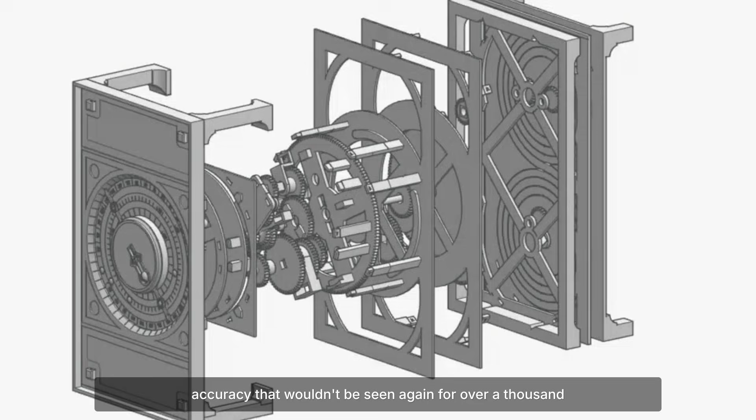In 1901, divers descended into the dark waters off a Greek island and pulled corroded bronze from a 2,000-year-old shipwreck. What they recovered looked like nothing, formless, destroyed. Then someone noticed teeth cut into the metal. Gears. Dozens of precision-engineered gears, designed to predict eclipses, track lunar cycles, and map the heavens with an accuracy that wouldn't be seen again for over 1,000 years. This was an ancient machine built to forecast the future, and no one can fully explain how it exists.

Salt stung the eyes of the sponge divers as they surfaced, hands raw from gripping barnacled stone and ancient metal. The year was 1900. Off the jagged cliffs of Antikythera, the Aegean wind battered the deck of the Sophia as battered fragments began to pile up: marble torsos, shattered amphorae, a lead ring still slick with the memory of the deep. Among them, a heavy corroded mass of bronze, rough as volcanic rock, thudded onto the planks. The logbook entry for April 8th, written in hurried Greek script, listed it as a bronze lump, the size of a small cannon. Lieutenant Konstantinos Mantsaris, the Navy officer overseeing the salvage, ordered the cargo sealed and escorted to Piraeus.

The Sophia's hull creaked as it carried its strange burden to Athens. On arrival, naval technicians weighed the lead salvage ring, 12 kilograms, copper traces glinting in the lab's gaslight. The ring's composition would later date the ship to the late 1st century BC, but at that moment, the focus was on the spectacle of the haul. Newspaper headlines in Athens called it a shipwreck full of treasures.

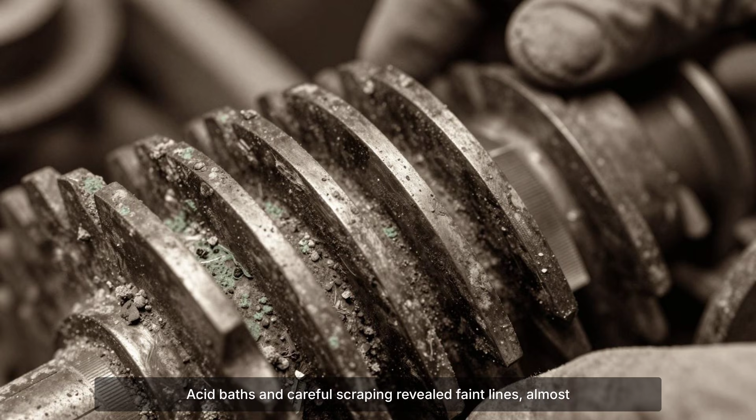At the National Archaeological Museum, a parade of artifacts began to fill the workshop. Curators in linen coats unwrapped each piece, brushing away salt and centuries of silt. The bronze mass received the catalog number BM 1900-01. Museum conservators, led by Dimitrios Kaligas, started the delicate process of cleaning. Acid baths and careful scraping revealed faint lines, almost like a screw thread, running beneath the corrosion. Ioannis Korkoulis, the museum's photographer, captured the first image of the object, its jagged surface lying beside a marble arm, both silent witnesses to a vanished world. The plate was filed under Ancient Technological Artifacts, a label that would soon feel almost comically understated.

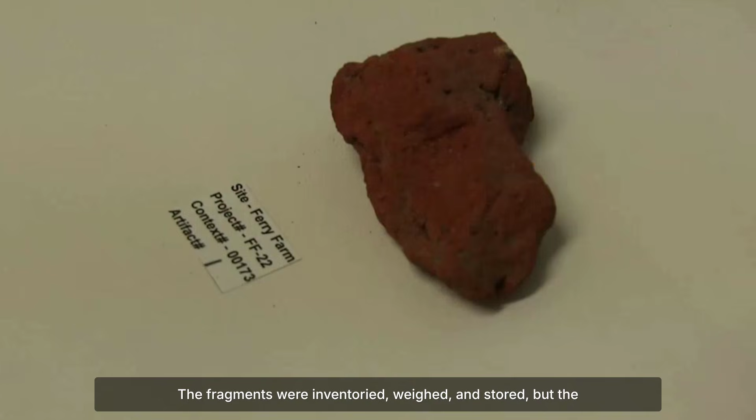The days blurred into weeks. On May 25th, the last cargo pull brought up a bronze armrest, later matched to a marble throne. By October, the museum's storerooms held nearly 70 objects from the wreck: statues, coins, glass, and that enigmatic bronze core. The fragments were inventoried, weighed, and stored, but the mechanism itself sat in a sand-filled crate, its purpose unreadable. Only a handful of museum staff handled it.

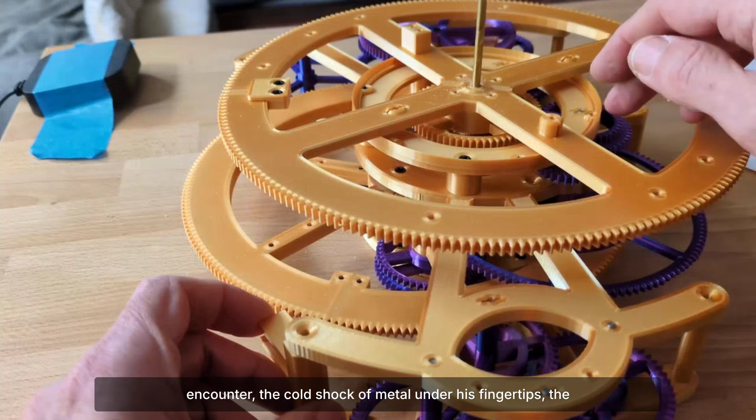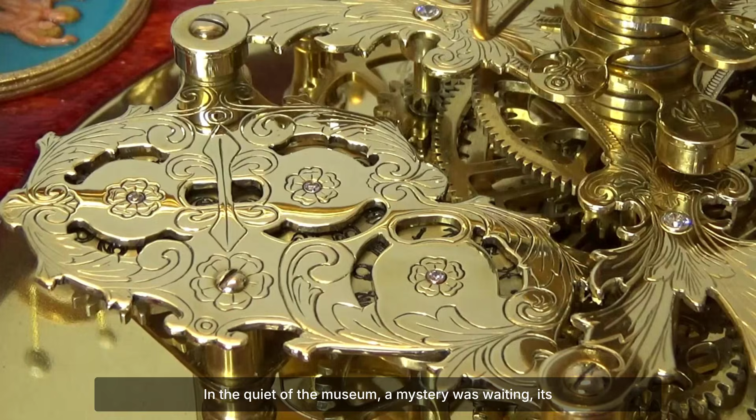Among them, Valerios Stais, who would later write of his first encounter, the cold shock of metal under his fingertips, the sense that something extraordinary lay hidden beneath layers of decay. Official records from this period are still preserved: Salvage Log A, the handwritten inventory, and the earliest black and white photographs. These documents trace the journey of the mechanism from seabed to museum, each entry a small act of faith that the object was worth saving. No one yet suspected what secrets the corroded gears would reveal, or how this battered relic would soon upend everything historians thought they knew about ancient science. In the quiet of the museum, a mystery was waiting, its answer locked inside a tangle of bronze teeth and forgotten time.

In the quiet halls of the National Archaeological Museum, the bronze fragments sat mostly ignored, cataloged alongside broken statues and battered coins. For years, scholars walked past the corroded gears, their meaning lost beneath centuries of oxidation.

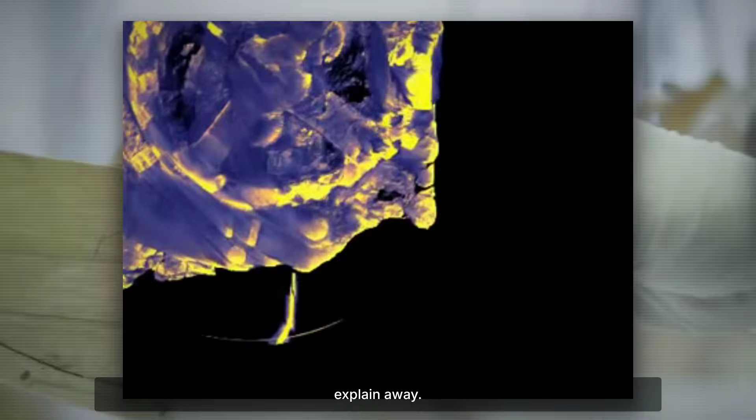Then, in the mid-20th century, a British physicist and historian named Derek de Solla Price began to study the mechanism in earnest. Price was not just another academic, he was a man drawn to riddles, a collector of anomalies that history could not explain away. When he first examined the Antikythera fragments, he saw something that no one else dared to imagine, a machine whose sophistication seemed to leap across centuries.

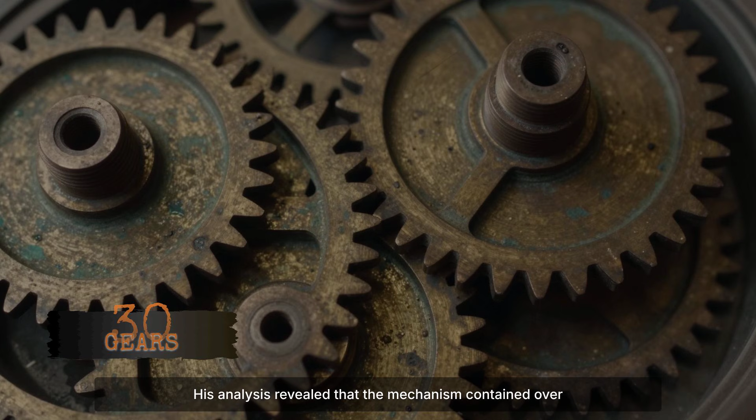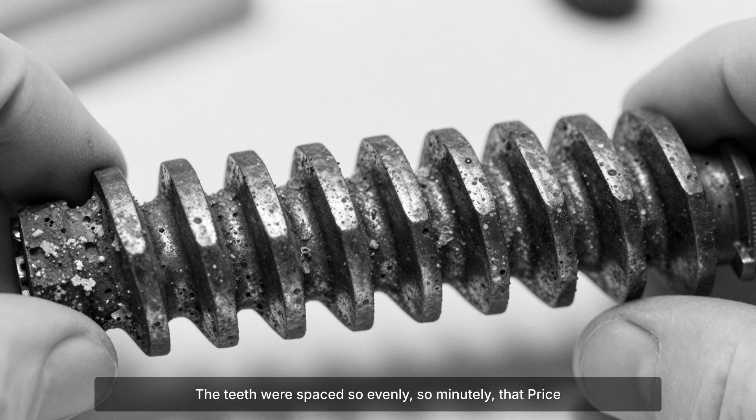Price's landmark monograph, Gears from the Greeks, published in 1974, sent a shockwave through the world of science history. His analysis revealed that the mechanism contained over 30 interlocking gears, each cut with a precision that rivaled the finest 14th century astronomical clocks. The teeth were spaced so evenly, so minutely, that Price compared their tolerances to those found in 14th century astronomical clocks, yet the Antikythera device predated those European marvels by more than 1,000 years. This was not a simple sundial or a decorative trinket. It was, Price argued, a true analog computer, built to predict the cycles of the heavens.

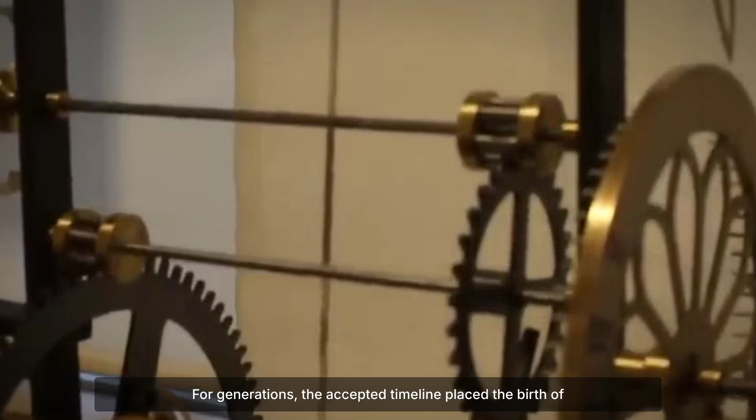The implications unsettled the foundations of classical scholarship. For generations, the accepted timeline placed the birth of complex gearing and mechanical calculation in the late Middle Ages. The Antikythera Mechanism shattered that narrative. Here was evidence of an ancient Greek workshop capable of engineering feats that should have been impossible for its time. The gap between this battered relic and the next known example of such technology was not decades, but centuries. Price's meticulous diagrams and gear ratio calculations forced historians to confront a new possibility, that the ancients possessed knowledge and skills that had been lost, forgotten, or deliberately erased.

The academic world struggled to absorb the blow. Some dismissed the mechanism as a one-off, a freak artifact produced by an unknown genius.

Others wondered if it was the tip of a vanished tradition, a hint that the ancient world was far more technologically advanced than anyone had dared to believe.

Price's work did more than catalog a strange machine. It challenged the very idea of progress as a steady climb. If such a device could be built in the Hellenistic world, what else had been possible, and what else had been lost? Even now, the Antikythera Mechanism stands as a rebuke to easy assumptions about the past. Its gears, silent and corroded, raise a question that refuses to go away.

And if the past can surprise us so completely, what other mysteries are still waiting just beneath the surface of history? A crank turns. Beneath ancient bronze, a hidden choreography begins.

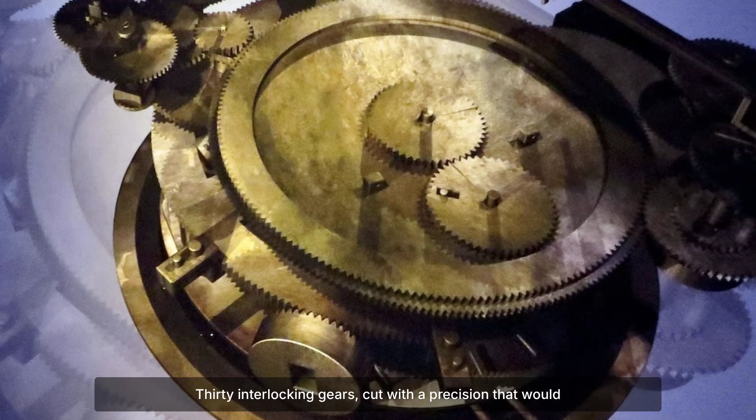30 interlocking gears, cut with a precision that would not be seen again for over 1,000 years, transmit force from one axis to another. The Antikythera Mechanism is not a clock. It does not measure time. It predicts it, calculates it, and displays the secret rhythms of the cosmos.

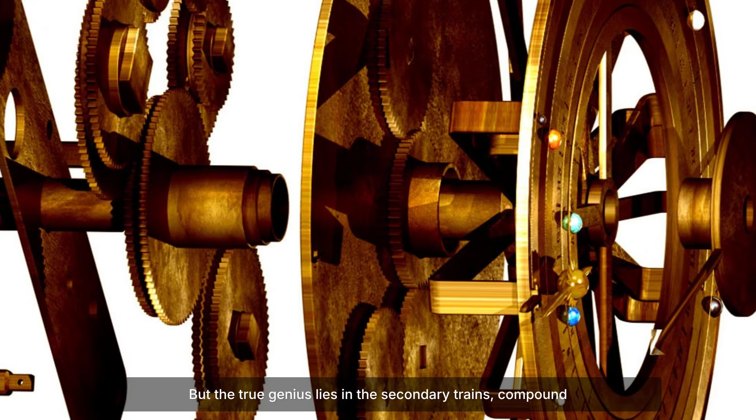The front of the device holds a dial inscribed with the Greek zodiac and the Egyptian calendar. As the main axle rotates, a pointer sweeps across a ring divided into 365 days, marking the progress of the solar year. But the true genius lies in the secondary trains, compound gears that transform a single steady turn into the maddening complexity of the heavens.

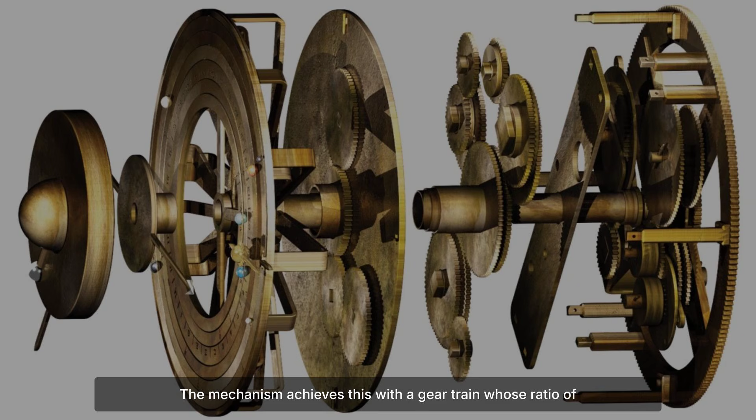The user can see, at a glance, which month and year it is in a cycle that governs festivals, harvests, and the timing of the Olympic Games.

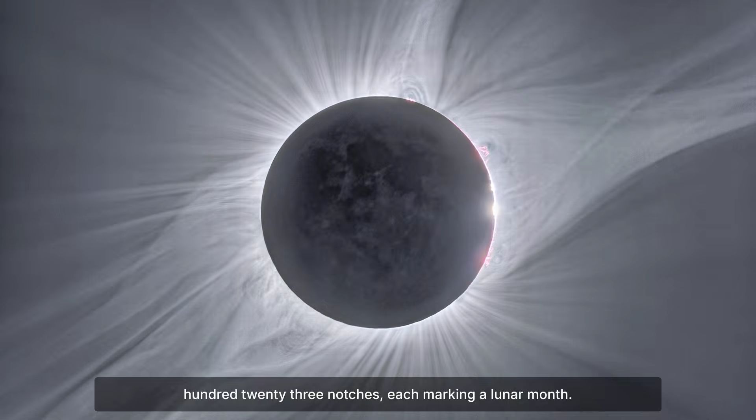On the back, the Saros dial winds in a tight spiral with 223 notches, each marking a lunar month. This cycle is the heartbeat of eclipses. Every 223 months, the Sun, Earth, and Moon return to nearly the same positions, making an eclipse possible. The mechanism's gears, including a wheel with 223 teeth, drive a pointer that tracks this cycle with uncanny accuracy.

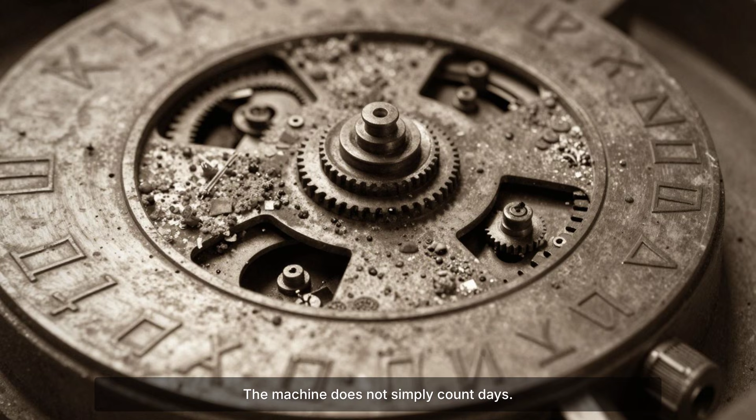Small inscribed glyphs warn of possible solar or lunar eclipses, transforming abstract mathematics into a tool for prediction and awe. The machine does not simply count days.

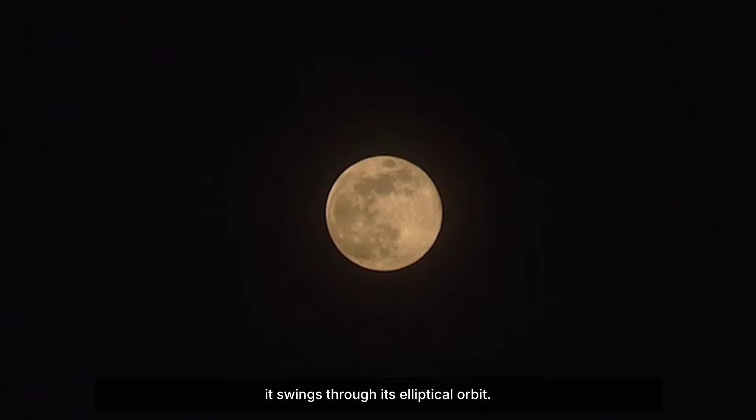A pin and slot mechanism, a tiny cam shaped with mathematical care, simulates the moon's irregular speed as it swings through its elliptical orbit. The pointer speeds up and slows down, echoing the real motion of the moon against the stars, an effect that would not be replicated in Western Europe until the age of mechanical clocks.

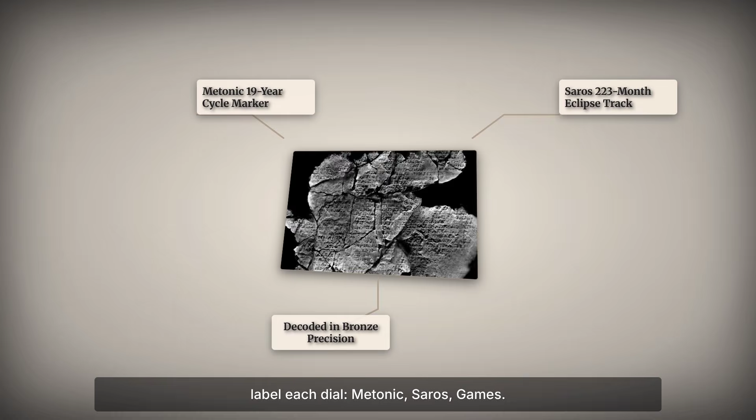Greek inscriptions, faint but legible under modern imaging, label each dial: Metonic, Saros, Games. The device does not ask its user to calculate. It shows. A turn of the crank brings the heavens into view, revealing eclipses, lunations, and the passage of years as mechanical certainty.

The evidence is overwhelming. Modern CT scans have identified the gear ratio, the tooth counts, the layout of each spiral. The 19-year Metonic cycle and the 223-month Saros cycle are not guesses, they are built into the bronze itself, cut by hand, measured to tolerances finer than a human hair.

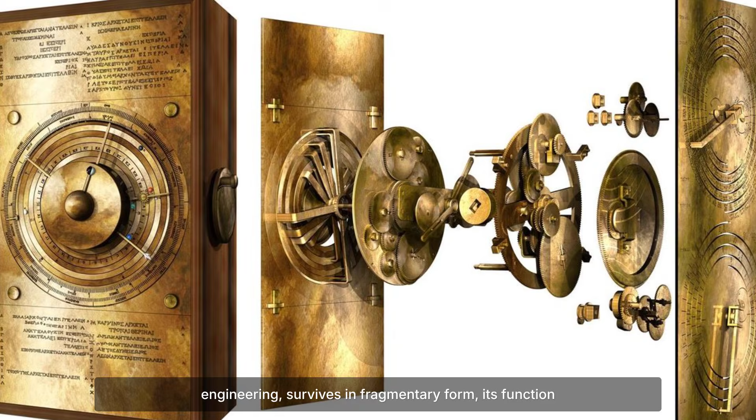Even the pin and slot cam, a hallmark of advanced engineering, survives in fragmentary form, its function confirmed by simulation and replica. Yet for all this precision, questions multiply.

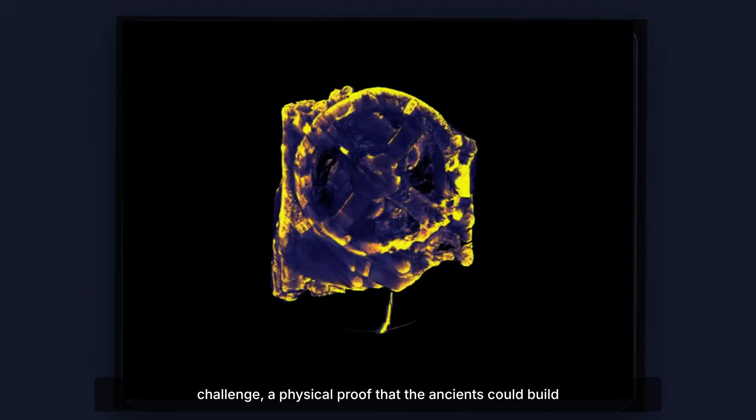Who designed a machine that could predict the future of the sky? How did ancient hands cut teeth so fine, arrange ratios so exact, and translate the mathematics of the cosmos into metal? The Antikythera Mechanism stands as both an answer and a challenge, a physical proof that the ancients could build machines that modern eyes struggle to comprehend.

But such mastery does not arise in a vacuum. To understand how this device came to be, we must look beyond the gears, into the world that imagined them. What kind of culture could conceive of such a machine, and why would its secrets vanish for centuries? The next turn of the story lies not in metal, but in the minds that shaped it.

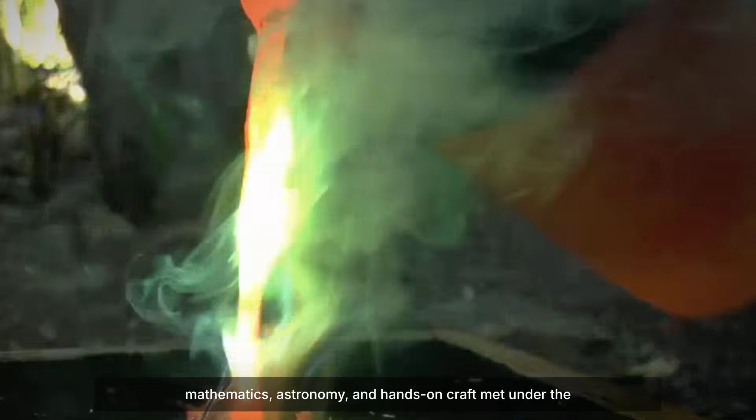On the bustling streets of Rhodes and Alexandria, the clang of bronze echoed from open workshops, mingling with the murmur of philosophers in shaded porticos. This was the Hellenistic world, a crossroads where mathematics, astronomy, and hands-on craft met under the gaze of kings and scholars. It's here, in the centuries before the Antikythera Mechanism slipped beneath the waves, that an unlikely alliance between intellect and artisan skill took root.

Bronze smiths hunched over forges, filing teeth into gear blanks with copper tools so fine that modern microscopy measures their pitch error at less than 0.2 of a millimeter. These were not simple laborers. Many belonged to guilds or family dynasties, their names lost, but their methods preserved in the metal. The same hands that cast statues for temples could cut gears for water clocks and automata.

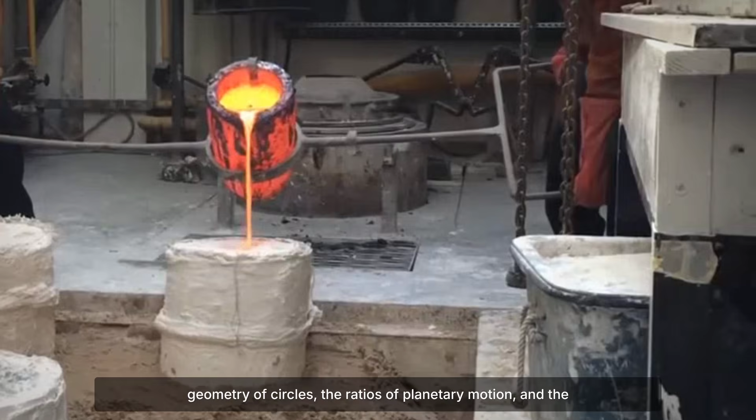In Rhodes, the city's famed School of Technology produced not just naval engineers, but craftsmen versed in the geometry of circles, the ratios of planetary motion, and the secrets of alloys that could withstand decades of use.

Patronage fueled this engine of innovation. Wealthy rulers, the Ptolemies in Alexandria and the Rhodian League, commissioned devices to predict eclipses, measure time for festivals, and display the order of the cosmos in public squares.

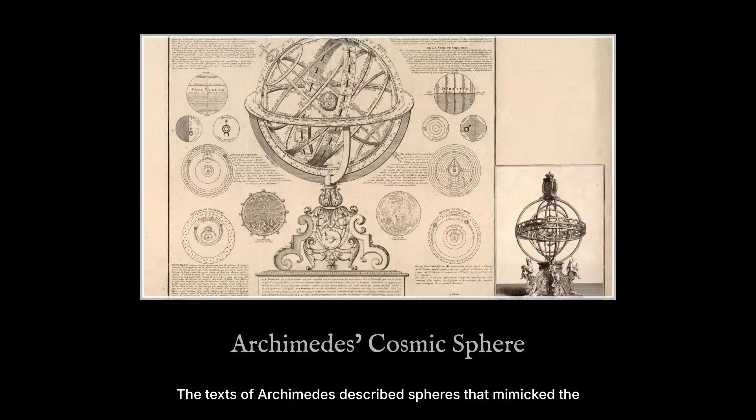The Library of Alexandria, a beacon for scholars like Hipparchus and Eratosthenes, held scrolls on trigonometry, planetary theory, and mechanical design. The texts of Archimedes described spheres that mimicked the heavens, while Hero of Alexandria detailed automata powered by hidden gears and water pressure.

These were not just theoretical exercises. They were blueprints for real machines, built by real hands.

Evidence survives in the mathematical treatises of the period. Hipparchus's tables of chords, an early form of trigonometry, allowed precise calculation of celestial cycles, knowledge later found inscribed on the dials of the Antikythera Mechanism.

Vitruvius, writing in the 1st century BCE, described water clocks with toothed wheels and escapements, mechanisms that required the same precision found in the Antikythera gears.

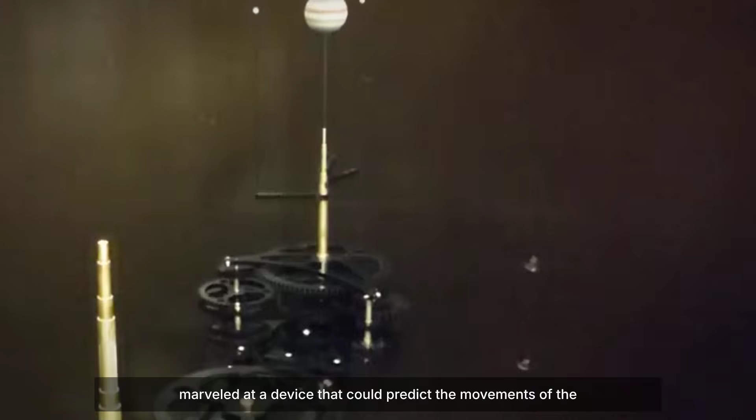Even Cicero, in his account of Archimedes' planetarium, marveled at a device that could predict the movements of the sun, moon, and planets, turning with a gear-like motion.

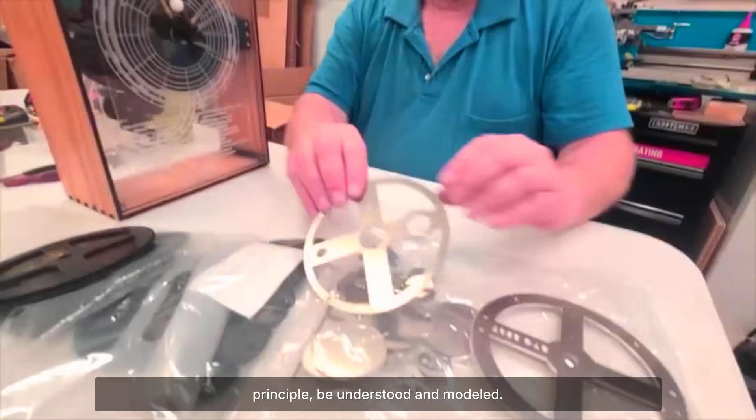Workshops were not isolated from the world of ideas. Philosophers debated the nature of the cosmos just steps from the forges. The Stoics taught that the universe moved according to rational laws, a cosmic machine whose workings could, in principle, be understood and modeled. This belief drove the translation of mathematical cycles into metal and motion.

The Antikythera Mechanism stands as the most spectacular survivor of this tradition, a product of minds who saw no boundary between theory and craft, who believed that the secrets of the heavens could be made tangible, even portable.

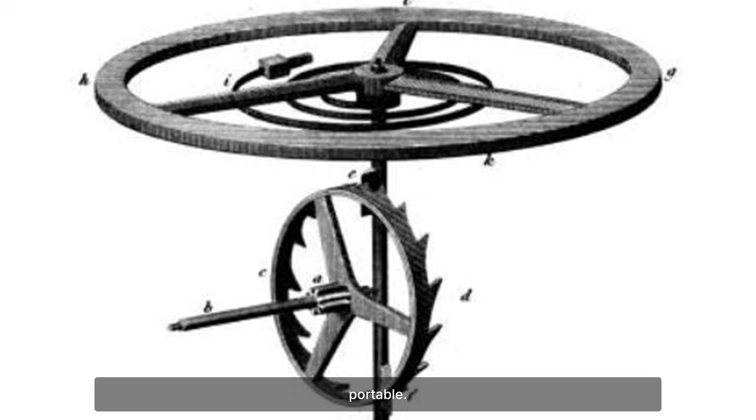Yet such mastery depended on a delicate balance. The expertise to cut gears, the mathematical insight to calculate cycles, the resources to fund years of labor, were all vulnerable to the tides of history.

When patronage faltered, when libraries burned, when skilled hands disappeared, the chain connecting knowledge to practice could snap.

The Antikythera Mechanism is not an isolated miracle. It is the visible tip of a submerged world, a network of workshops, scholars, and patrons whose collaboration made the impossible real. The question that lingers is not only how such genius arose, but why so little of it survived.

In the next turn of the story, the mystery deepens. How did the knowledge to build such machines slip through the cracks of history, leaving only fragments to puzzle the modern world? No other device like the Antikythera Mechanism has ever surfaced from the ancient world.

The archaeological record stands silent. No twin, no blueprint, not even a broken gear unearthed from the sands of Alexandria or the workshops of Rhodes.

The absence is haunting. Some scholars point to the destruction of libraries, especially the burning of Alexandria, as a wound that bled away the technical manuals and mathematical treatises needed to recreate such machines.

Others trace the decline to the collapse of royal patronage. When the Ptolemies and the Rhodian leagues vanished, so did the wealthy commissions that once fueled workshops and paid the salaries of master craftsmen. Without the steady hand of a patron or the shelter of a library, the knowledge to cut teeth so fine, to calculate cycles so exact, could slip away in a single generation.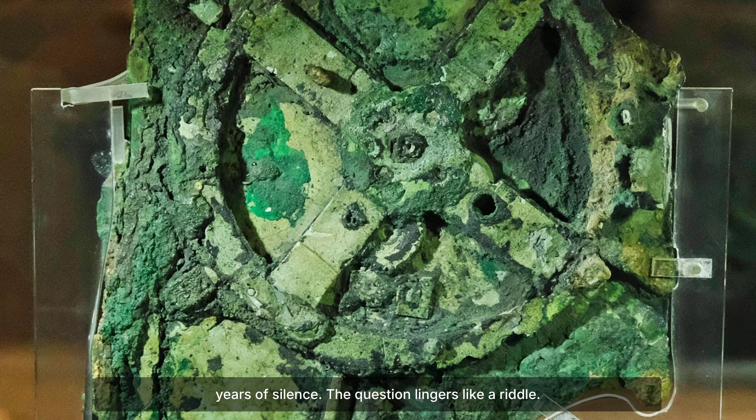The Antikythera Mechanism remains a solitary survivor, a whisper from a vanished tradition, surrounded by 1,000 years of silence. The question lingers like a riddle. How could such brilliance appear only to vanish so completely?

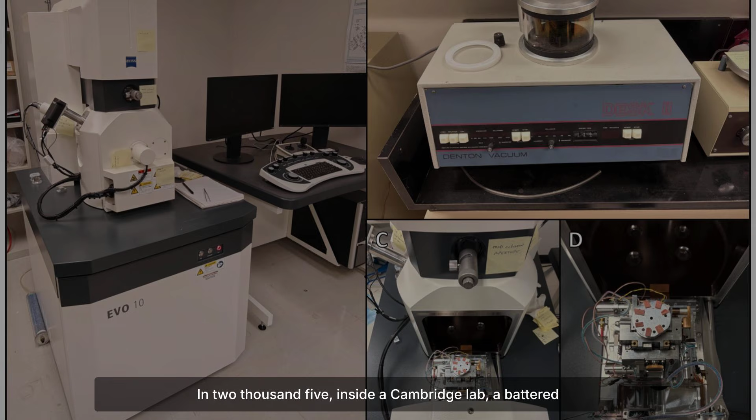The mystery now calls for new ways of seeing, new tools to probe what the fragments still conceal. In 2005, inside a Cambridge lab, a battered bronze fragment is placed beneath an industrial CT scanner.

Tony Freeth and Mike Edmunds lean in as the machine slices through centuries of corrosion, capturing over 2,500 images, each just 1/10 of a millimeter thick.

The screen fills with ghostly outlines, gear teeth, axles, pivots, and Greek inscriptions, all hidden from sight for 2 millennia. For the first time, the Antikythera Mechanism's internal geometry is mapped in 3-dimensional detail.

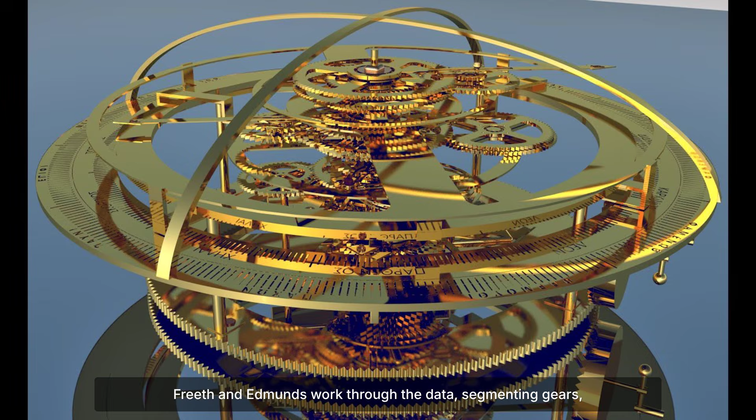Freeth and Edmunds work through the data, segmenting gears, tracing lost axles, and reconstructing the logic of ancient engineering. Piece by piece, the 3-dimensional model grows, digital fragments merging into a working hypothesis.

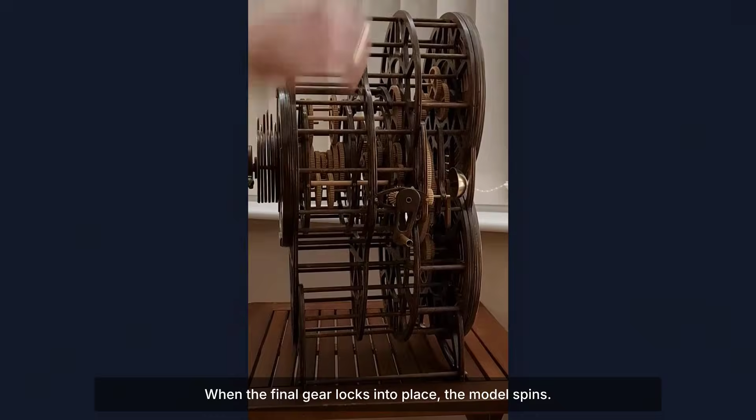When the final gear locks into place, the model spins. Dials advance, pointers sweep, and the cycles of the sun and moon play out as they did in antiquity.

The first physical replica, built from these scans, turns smoothly. The Metonic dial marks the 19-year lunar cycle, and the Saros spiral predicts eclipses. The mechanism works, not just in theory, but in bronze.

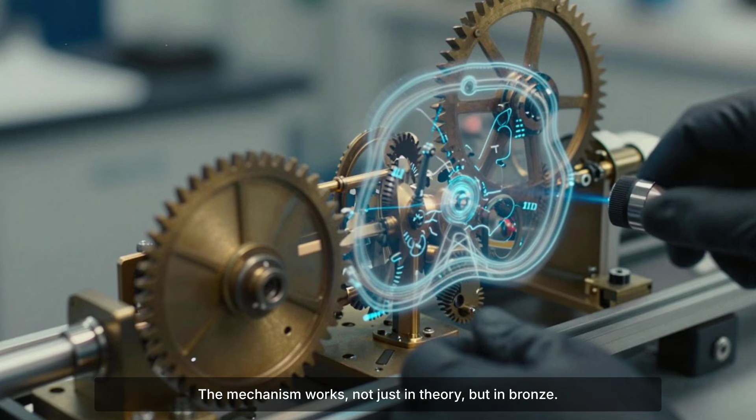The Antikythera Mechanism, once a riddle, now moves with purpose, its ancient science alive again.

The mechanism's gears still defy our expectations of the ancient world. As new discoveries force us to revisit what we think we know, the line between lost genius and present progress blurs. Every fragment recovered challenges our sense of modernity.

Perhaps the future is not created entirely from new ideas. Perhaps some of humanity's greatest innovations are echoes of knowledge we once already possessed.